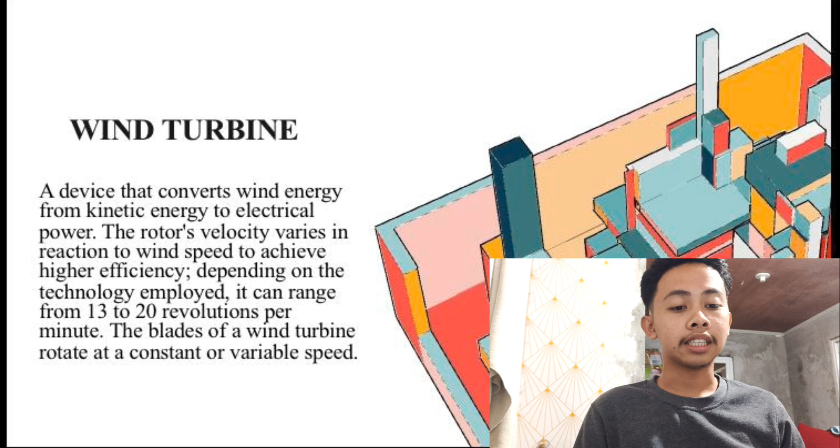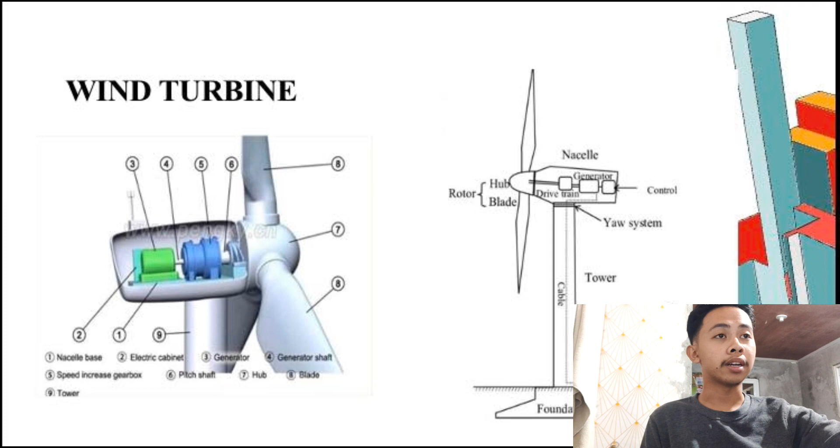And this is the parts of the wind turbine. Later on, we will discuss the parts of a wind turbine.

The operating principle of the wind turbine. The wind turbine is one type of renewable energy that generates electricity using the power of wind. As mentioned earlier, it generates kinetic energy and produces electrical energy.

The basic concept of a wind turbine is to gather potential and kinetic energy. As mentioned earlier, using the wind, it spins a rotor which is attached to the wind turbine.

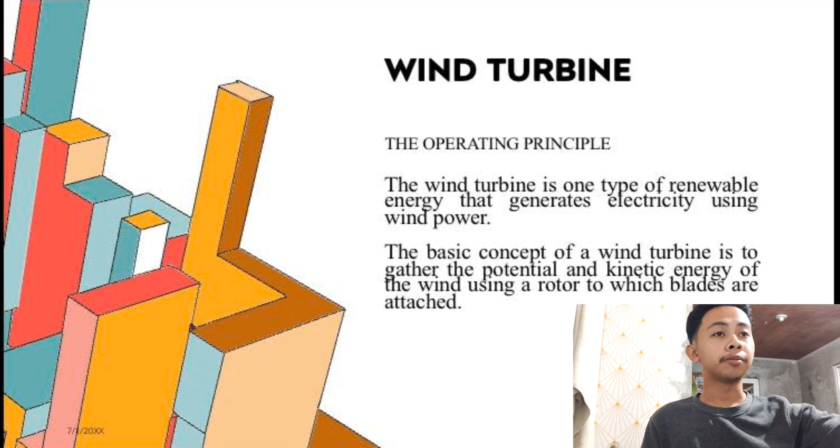Wind turbine operating principle: electricity is produced when the wind drives the blades, which in turn spins a shaft that is attached to a generator.

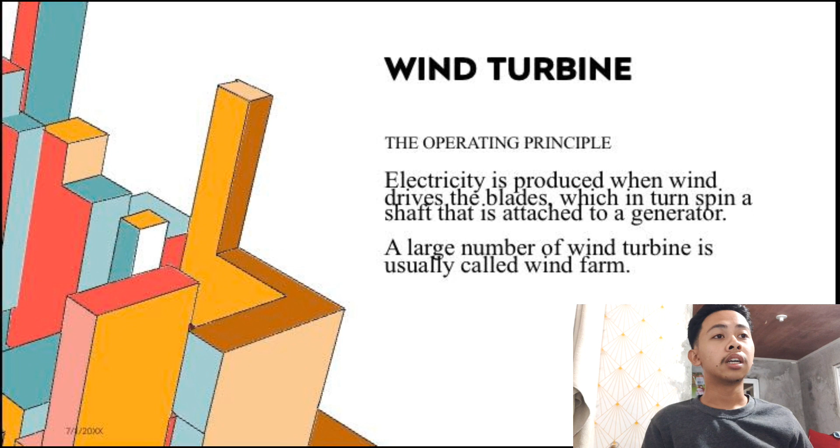Here we see the picture of the detailed parts of a wind turbine. We can see the blades, rotor, pitch system, low speed shaft, gear, controller, anemometer, wind vane, nacelle, high speed shaft, generator, yaw motor, tower, brake, yaw drive, and wind direction.

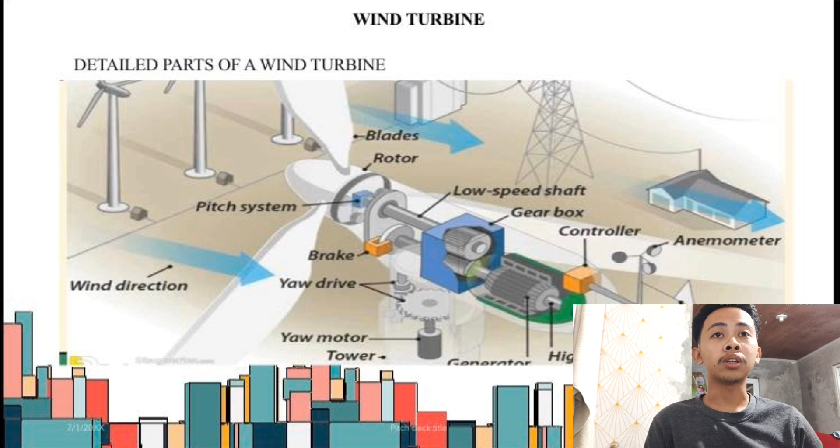The generator is another crucial component of a wind turbine. Its function is to convert mechanical energy to electricity according to the principle of Faraday's law, which is the mechanical energy converted to electricity that we can use.

And the wind vane, which we see at the very back, is a device that gives information about the wind. It helps us get information about where the wind is blowing toward and where it hits. It is usually mounted on top of the wind turbine.

The blades of a wind turbine, the large three blades, are essential for the wind turbine because those are the components that interact directly with the wind. They are the ones always facing the impact of the wind, always catching the wind.

They are aerodynamically designed to convert the wind's kinetic energy into mechanical energy, transmitted to the rotor shaft.

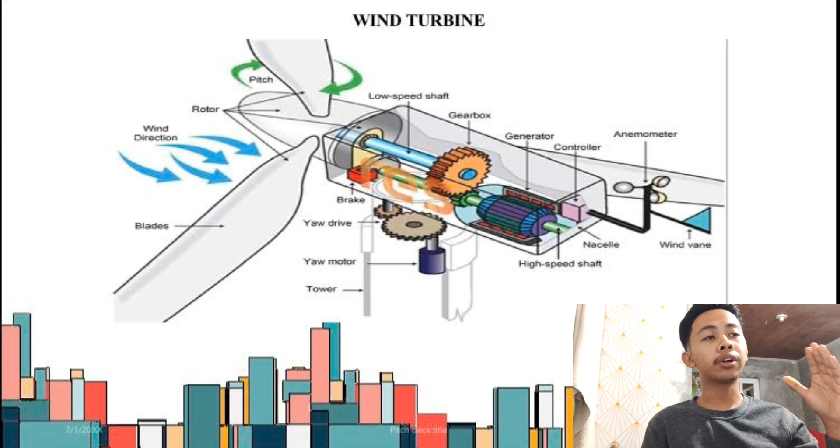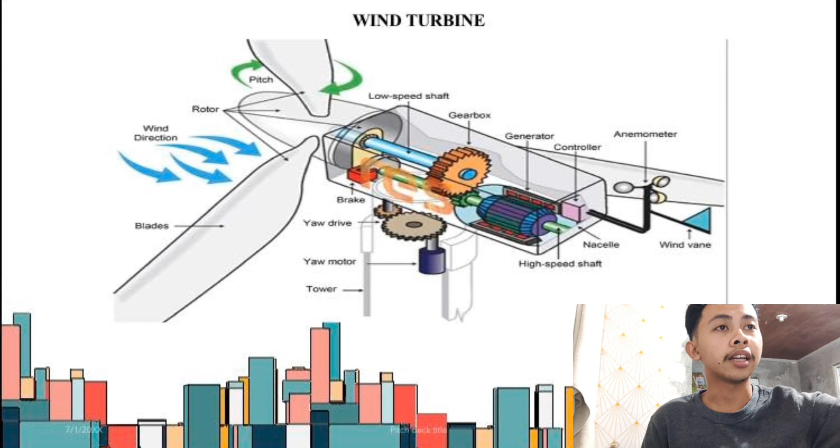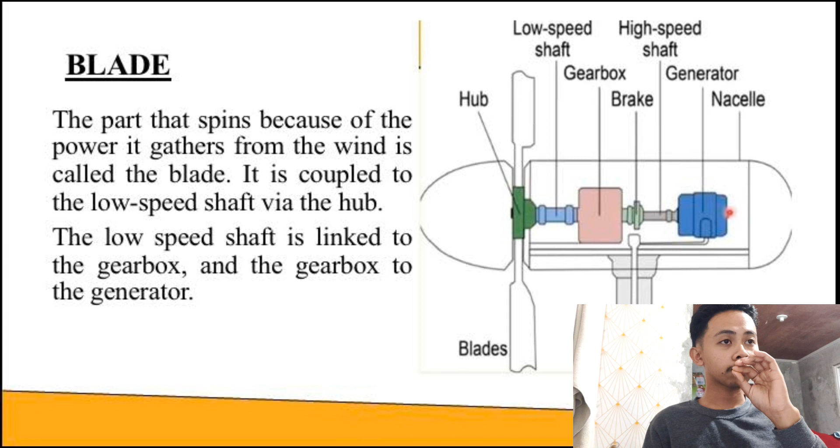Sabi dito, the part that spins because of the power it gathers from the wind is called the blade. Yon ang part na umiikot na nag-gather ng power galing sa hangin, yung blade. It is coupled to the low speed shaft via the hub. So hub, tapos siya yung nagbibigay dun sa low speed shaft na umiikot via the hub.

Sabi dito, the low speed shaft is linked to the gearbox. Makikita nyo dito na ang low speed shaft ay nakalink sa gearbox. At yung gearbox naman ay nakalink sa generator.

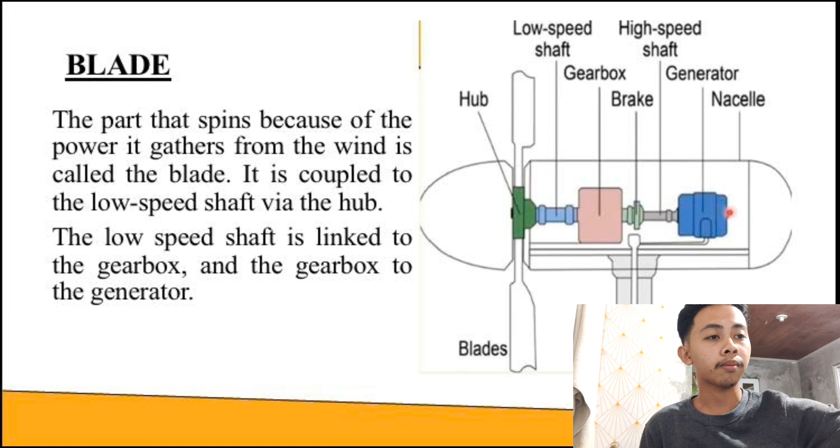Electricity is produced when the generator spins. Sabi dito, napoproduce ang electricity when the generator spins. Pag umiikot daw yung generator, nakakapag-produce daw ng electricity.

Due to the blade's revolution, most wind turbines consist of 3 blades for the best efficiency. Makikita natin na karamihan ng mga turbine na nakikita natin ay nagko-consist lang ng 3 blades para sa mas magandang efficiency.

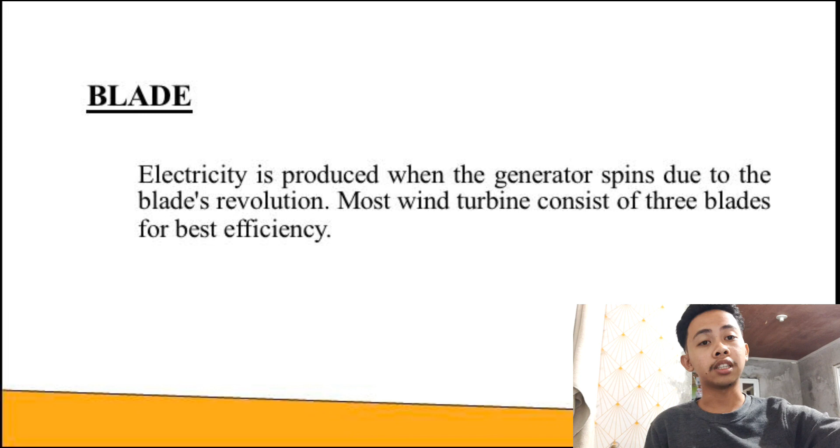Blade design. To create a quantity of electricity, wind turbine blades typically need to be huge, tall. Its design maximizes wind power output while minimizing expenses.

Sinasabi dito na ang blade design ng isang wind turbine ay nagcre-create ng quantity ng electricity. Kinakailangan daw ng isang blade ng isang wind turbine ay typically malaki at mahaba. Sabi dito, design maximize the wind power output habang minimizing expenses.

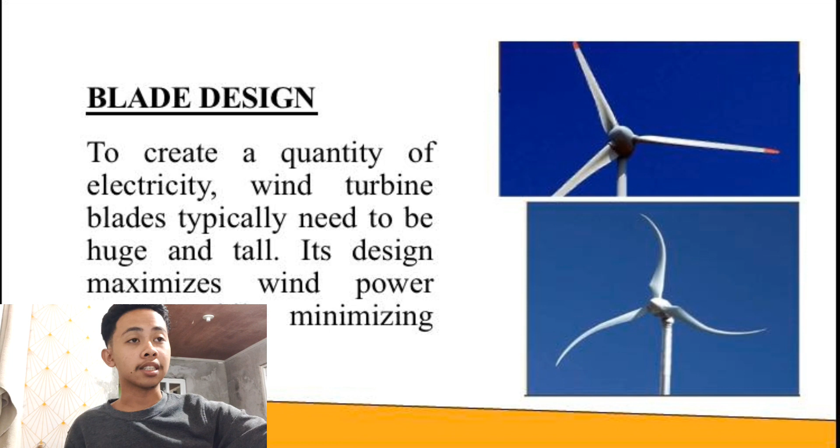The longer the blade, the better. Sabi nga, kung mas mahaba ang blade, mas better. The longer it gets, the more capability in capturing kinetic energy coming from the wind.

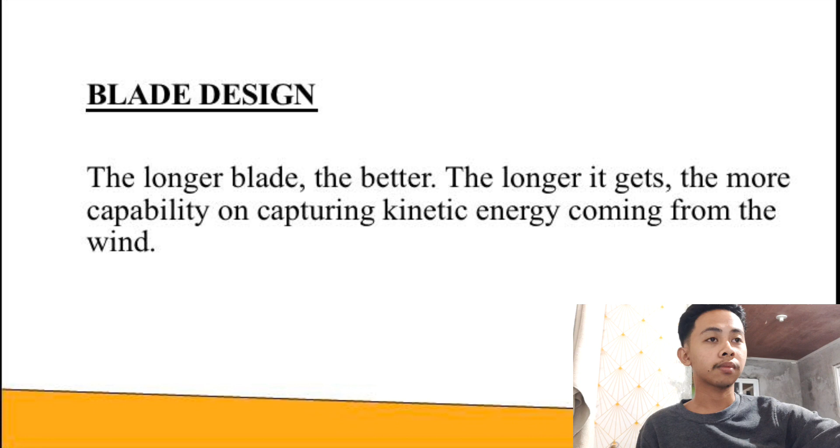New wind turbines that are quieter, more compact, and able to produce more power with less wind have been made possible by design advancement. Sabi dito, new wind turbines that are quieter, more compact, and able to produce more power.

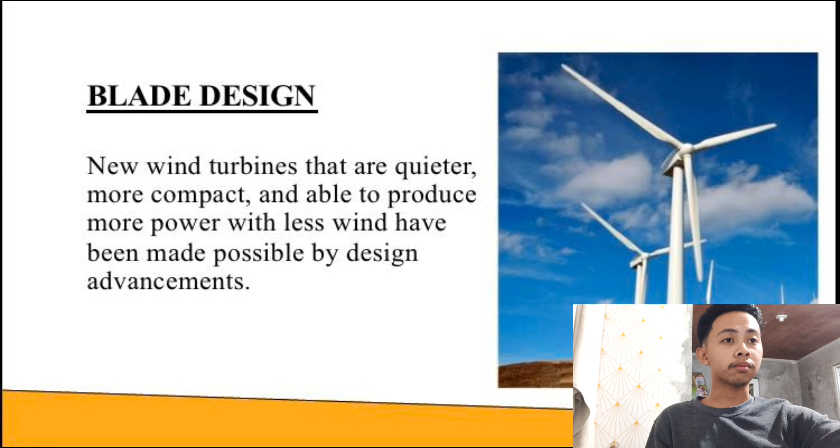Its length vary. Ito yung length o haba ng isang blade ng isang wind turbine. Sabi dito, its length varies at around 50 meters average, with 107 meters currently the longest.

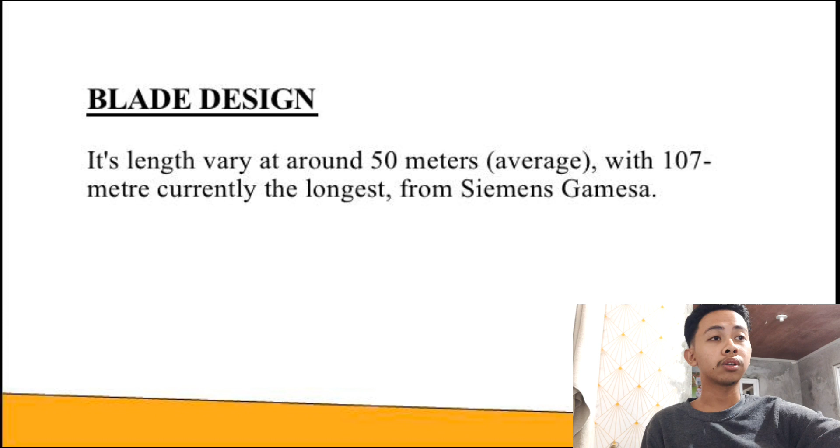Makikita natin na 107 meters currently the longest, from Siemens Gamesa. Yun lang.

Ayun, dito naman tayo sa airfoils o wind turbine parts blade design. Airfoil is a cross-sectional shape of the blade that determines its aerodynamics. They are crucial to blade design.

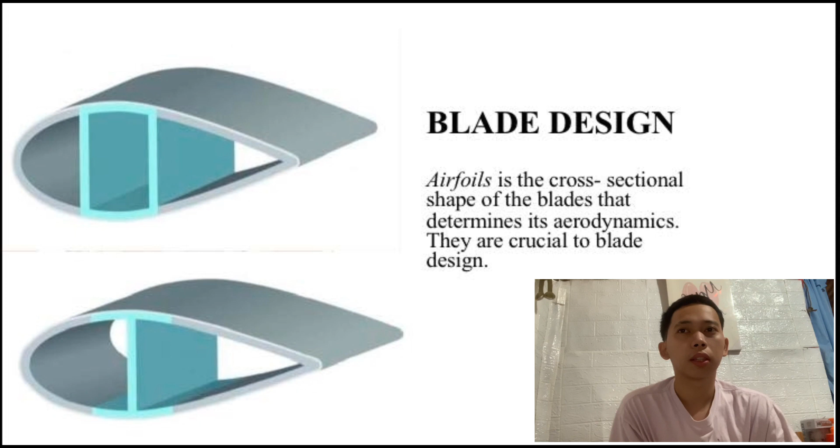With the help of this airfoil design, a wind turbine may move its blade tips faster than the wind, producing more power and higher efficiency. Yung tulong ng airfoils sa wind turbine ay para maging mas malakas at tumaas yung pagpo-produce ng electricity.

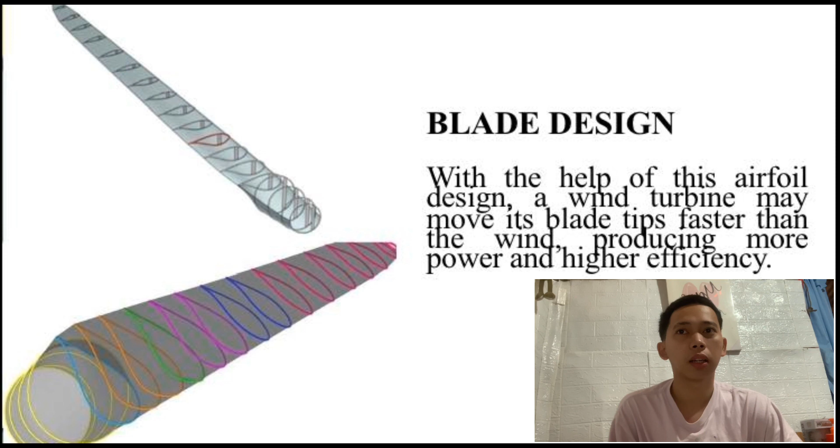Malaking tulong ito sa mga wind turbine, kasi sabi nga unpredictable yung wind. So through this airfoil, mas ayos niya mabuti yung operation.

Next is the airfoil design. Dito makikita natin yung mga types ng airfoils. Meron mga most curve, tapos meron ding lightly curve lang naman. Pinapakita dito na merong iba't ibang design ang airfoil. Thick airfoil family for large blades, then thin airfoil family for medium blades.

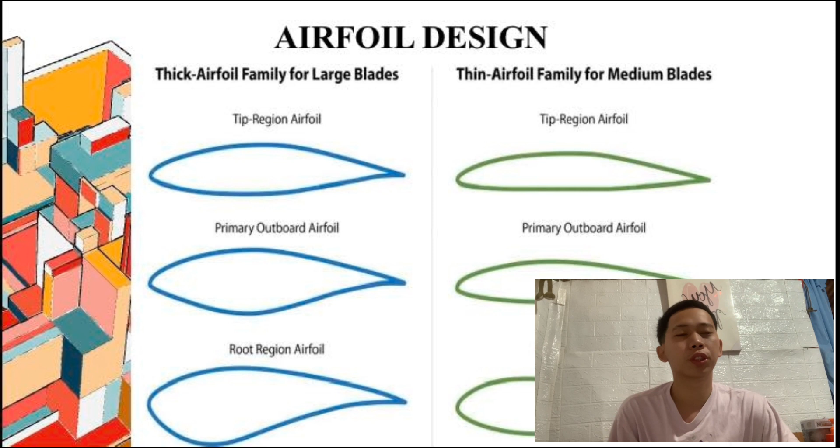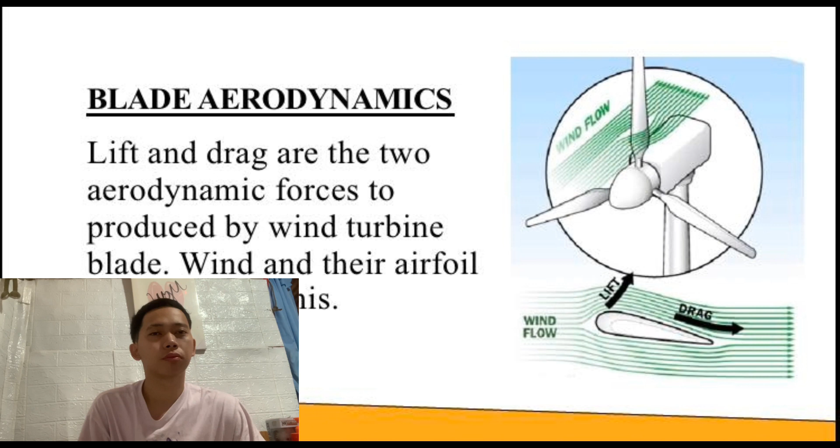Next, lift and drag are the two aerodynamic forces produced by wind turbine blades. Wind and their airfoil are playing for this. Meron two types yung aerodynamics, lift and drag force. Yung lift ay perpendicular to the airflow, tapos yung drag naman ay in the line. Makikita nyo dito sa figure na ito, yung lift paangat papunta, tapos yung drag naman ay parang in the line lang sa agos ng ihip ng hangin.

Wind turbine parts, lift and drag formula. Sa pagkuha ng lift and drag formula, this is the equation: lift equation, tapos yung drag equation. Ito yung para makuha natin yung bilis tsaka yung pag-angat ng hangin.

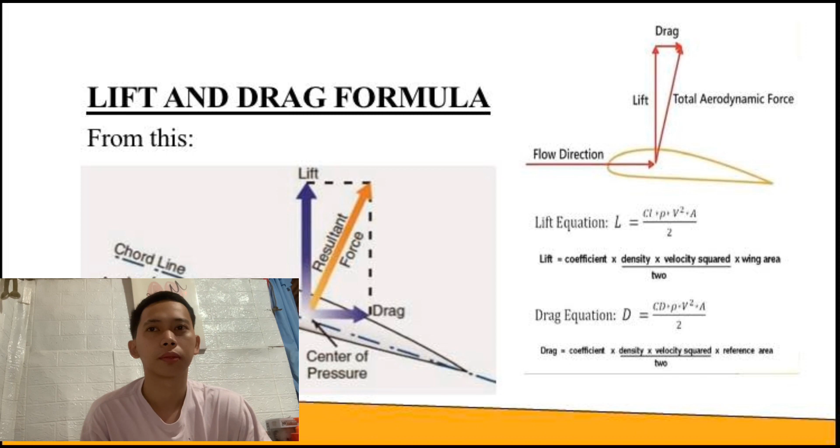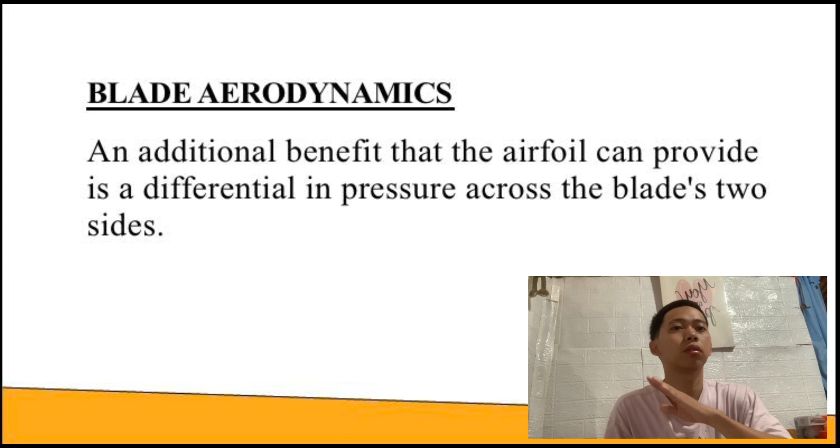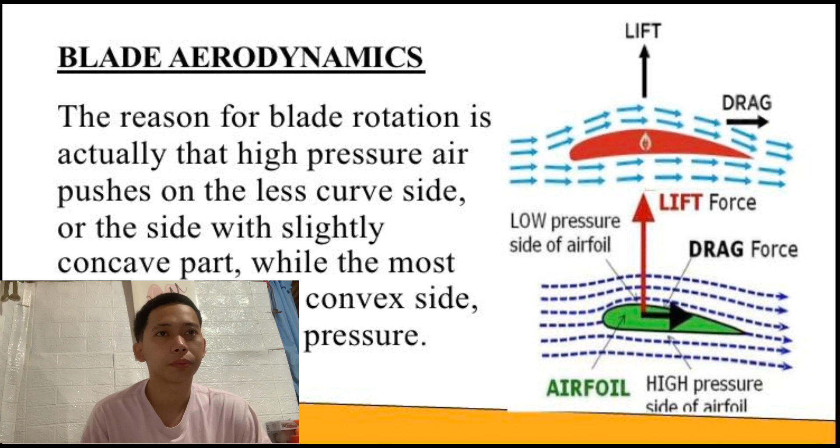An additional benefit that the airfoil can provide is a differential pressure across the two sides. Both sides have benefits, front and back. It shouldn't be the same curve - there should be a less curved side and a more curved side. The reason for blade rotation is that higher pressure air pushes on the less curved side, while the most curved or convex side generates low air pressure. So as explained, each side needs balance - high pressure air pushes the less curved side, as we can see in the figure, while the most curved side generates low air pressure.

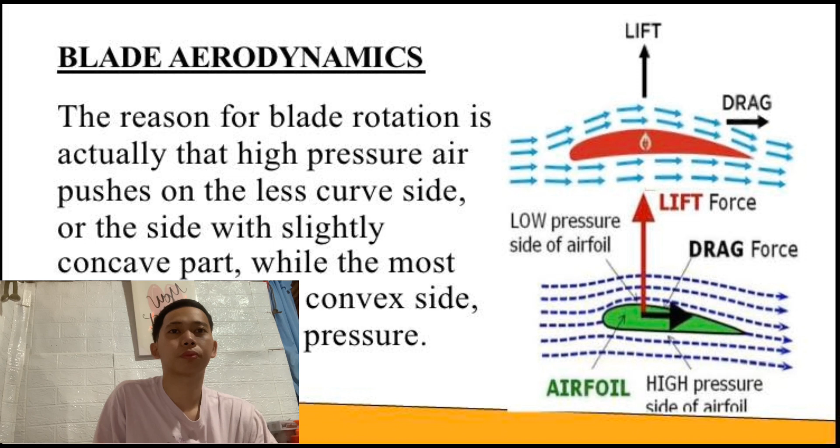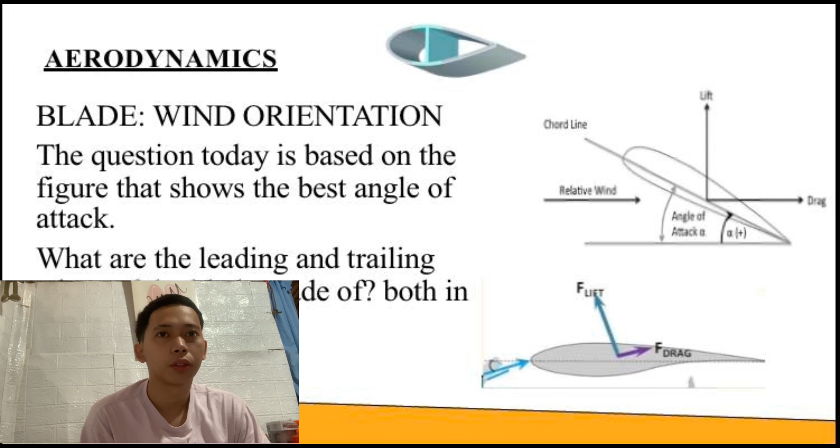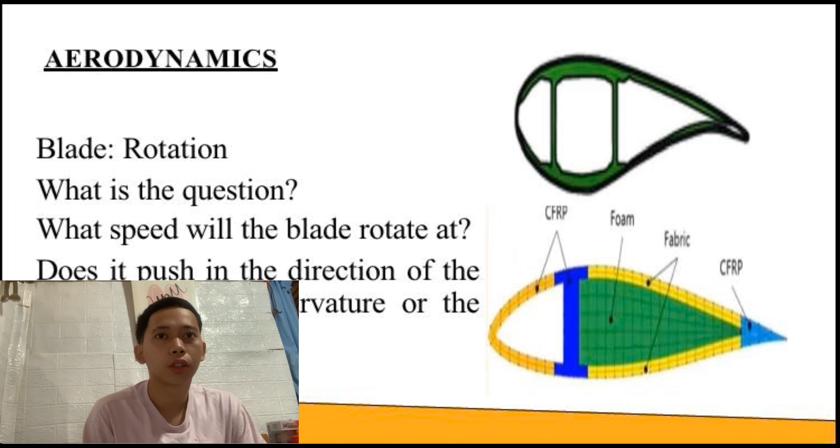Blade rotation - what is the question? What speed will the blade rotate at? Does it push in the direction of the side with greater curvature or the side with less curve?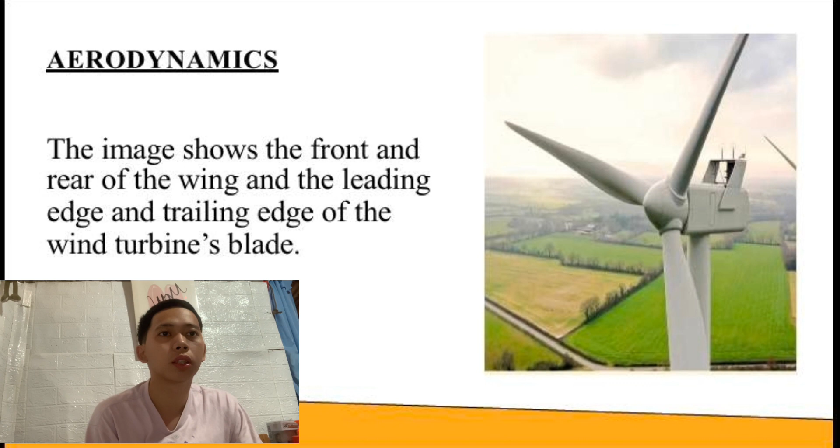Next is blade wind orientation. The image shows the front and the rear of the wing, and the leading edge and trailing edge of the wind turbine's blade. That's based on our PPT.

The thing that needs to be considered when designing a blade is twisting and tapering of its lateral portion. Did you know the blades aren't just simply curved - they're twisted and tapered? Because with this kind of blade design, the rotation speed increases.

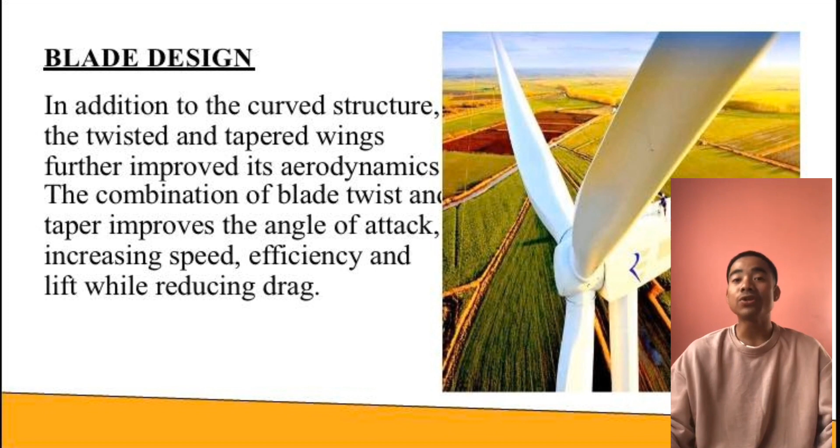And there's what's called lift, while reducing drag. So what is lift? Lift is the reason why rotation occurs. And drag is what opposes the rotation - it should be reduced. Take note: if you're designing a blade, you should focus more on lift force and reduce the drag force.

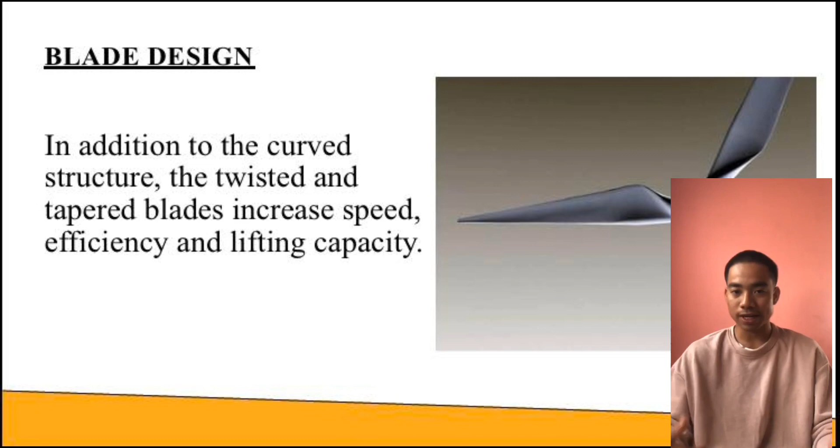So, here is the question based on the previous slides: what number of blades is the best design considering all the factors in construction and operation of a wind turbine?

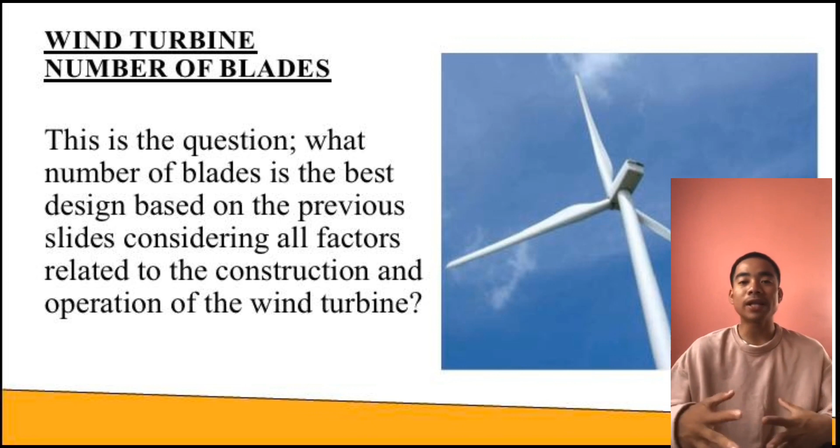As I said earlier, in designing blades, the one that should be minimized is the drag force - that's what we should reduce. And the one that should be maximized or increased is the lift force. Here are the rules of thumb.

The fewer blades, the better, since there will be less drag and an increase in efficiency. Because the more blades there are, they serve as an obstruction. And the more obstruction there is, the bigger the drag force becomes. So the fewer blades, the better.

Since there will be less drag - and on the other hand, the number of blades increases the torque and reduces the optimum rotation speed. To clarify further, what exactly is torque?

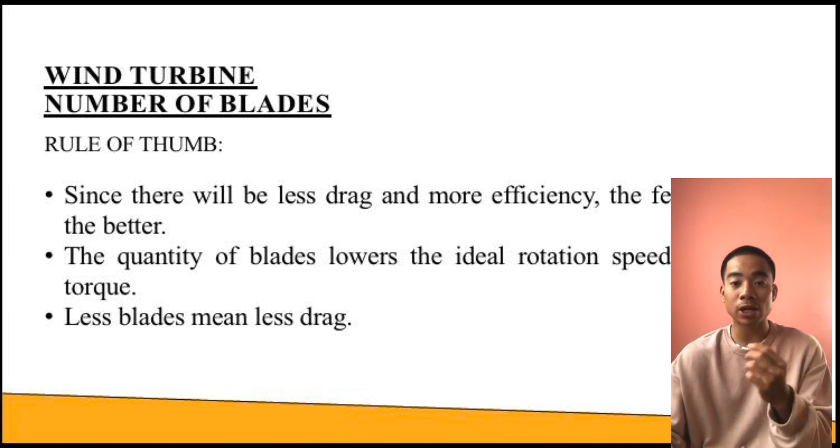One blade, because of the decreased drag, one blade would be the optimum number when it comes to energy yield. However, one blade could cause the turbine to become unbalanced, and this is not a practical choice for the stability of the turbine.

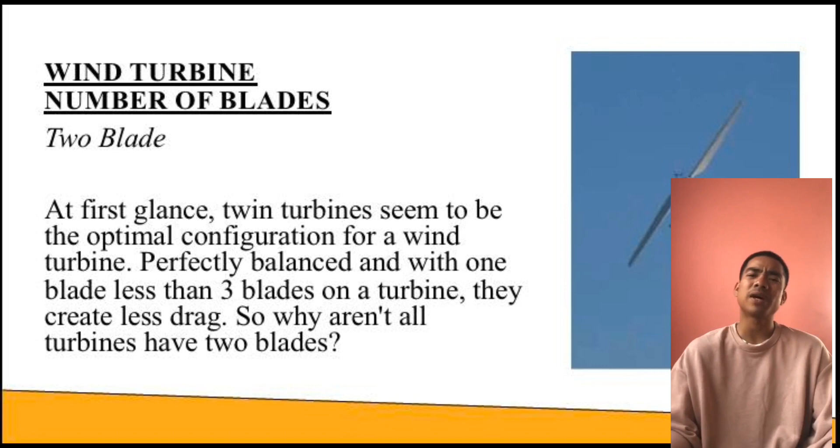At first glance, two-bladed turbine seems like the optimal configuration for a wind turbine. Perfectly balanced - yun yung sinabi ko kanina. And with one less blade than a three-bladed turbine, they will generate less drag. So why are not all turbines made with two blades? So ito nga yung pinaka-issue.

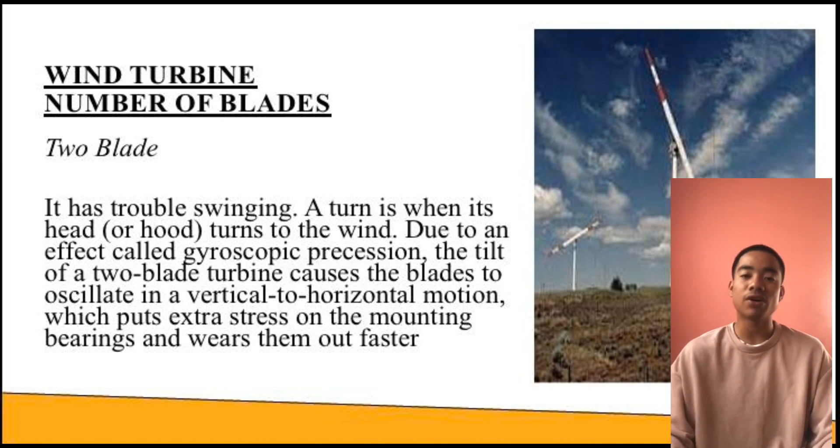So nabanggit nga dito ni Sir Marvin na yung two-bladed turbine nyo, it becomes wobbly. Ito magkakaroon ulit ng unbalanced force which puts stresses in individual parts. And for that reason, this two-bladed design is unlikely to be selected when it comes to design of number of blades. So dito naman tayo sa more than 3 blades.

Any number of blades greater than 3 blades would create greater wind resistance, slowing the generation of electricity and thus becoming less efficient than a 3-blade turbine. Parang ganito lang yun eh - the more blades, pinapataas mo lang lalo yung drag force. So that's why the best talaga ang 3-bladed.

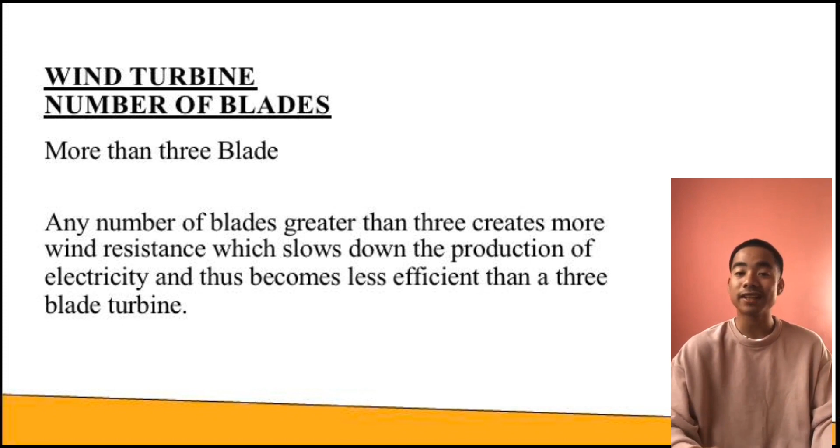Okay, tayo doon. So ayun, basahin na lang natin yung ibig sabihin dyan. Any number of blades greater than 3 would create greater wind resistance, slowing the generation of electricity and thus becoming less efficient than a 3-blade turbine.

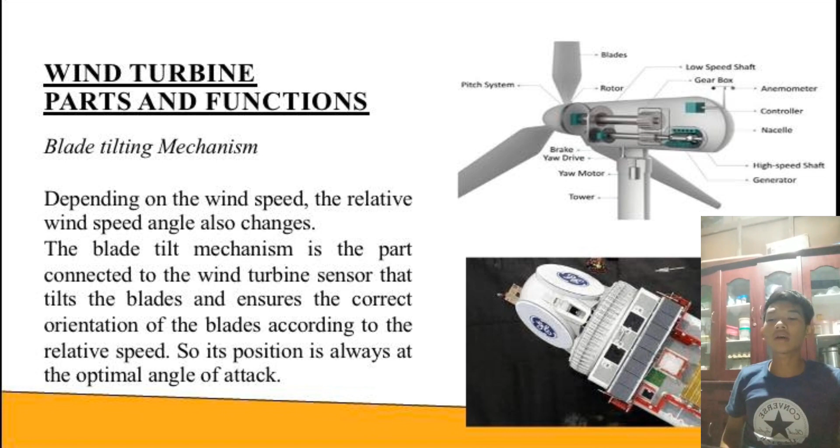Blade tilting mechanism. Depending on the wind speed, the relative wind speed angle also changes. The blade tilt mechanism is the part connected to the wind turbine sensor that tilts the blade and ensures the correct orientation of the blade according to the relative speed, so its position is always at the optimal angle of attack.

Nacelles. The housing behind the blade that houses the generator, gearbox, slow speed shaft, and other tiny components.

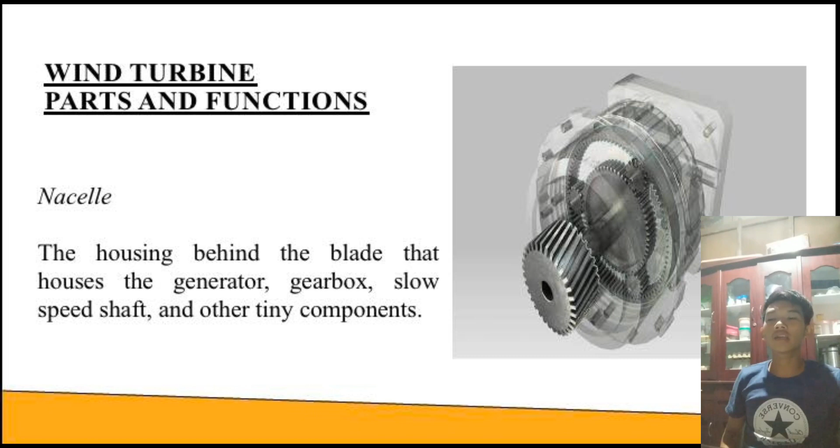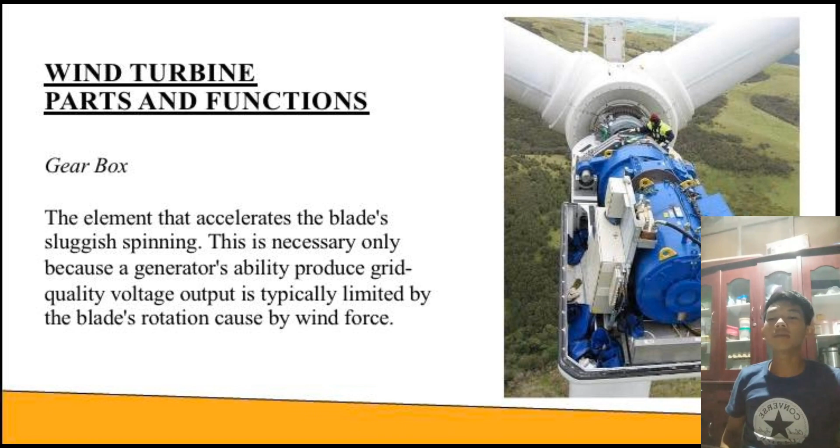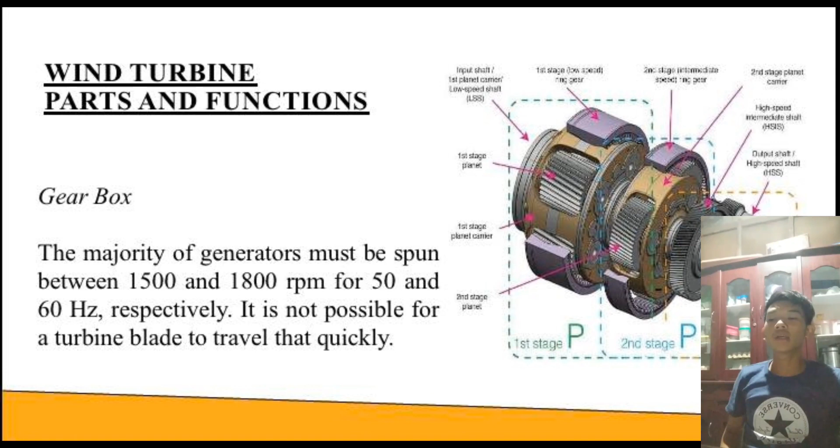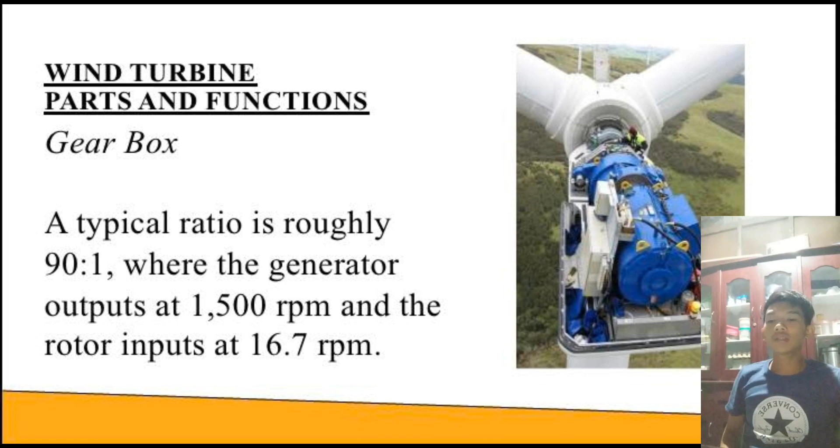Gearbox. The element that accelerates the blade's slow spinning. This is necessary because a generator's ability to produce grid-quality voltage output is typically limited by the blade's rotation caused by wind force. The majority of generators must be spun between 1,500 and 1,800 RPM for 50 and 60 Hz respectively. It is not possible for a turbine blade to travel that quickly. A typical ratio is roughly 90 to 1, where the generator output is at 1,500 RPM and the rotor input is at 16.7 RPM.

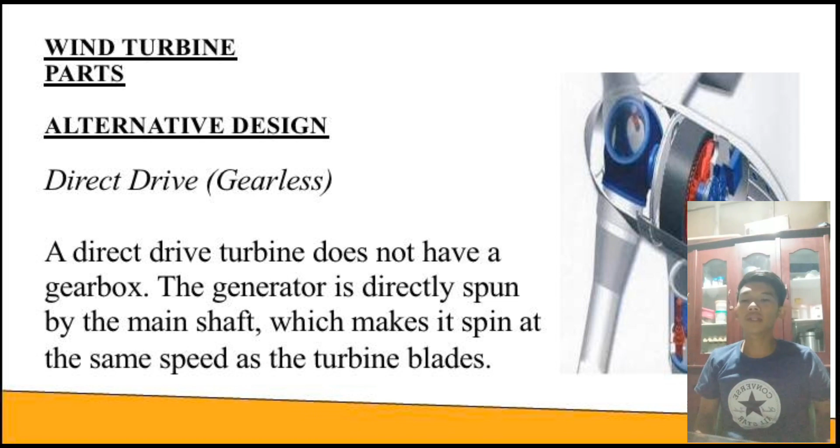Direct drive or gearless. A direct drive turbine does not have a gearbox. The generator is directly spun by the main shaft, which makes it spin at the same speed as the turbine blades. In contrast to geared types, the PMDD generator's slow rotation and fewer moving components lessen fatigue and pressures on the turbine, resulting in less noise and vibration, a longer lifespan, and cheaper maintenance costs.

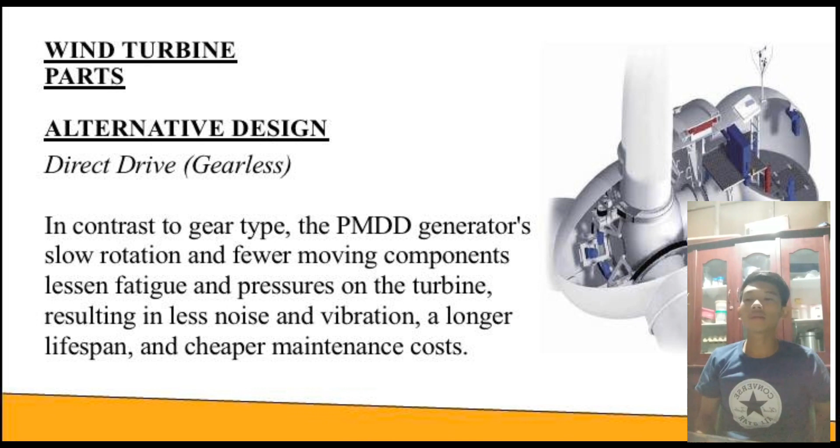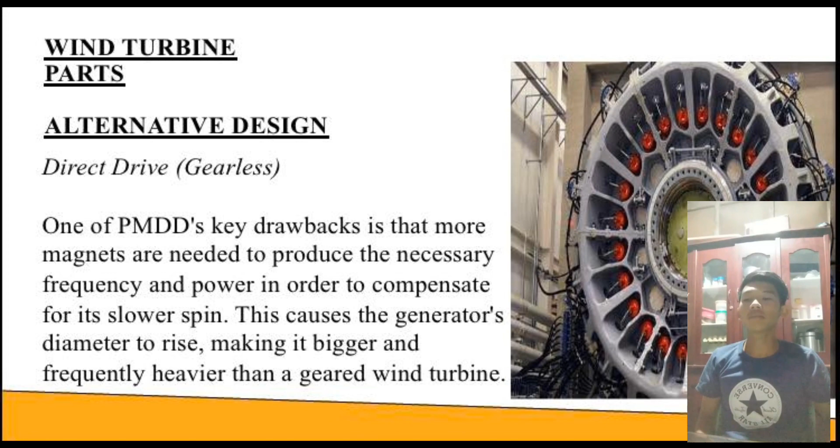One of PMDD's key drawbacks is that more magnets are needed to produce the necessary frequency and power in order to compensate for its slower spin. This causes the generator diameter to rise, making it bigger and frequently heavier than geared wind turbines. Another issue is that the additional magnets of this type are composed of neodymium, which is a costly material. Up until recently, gearbox turbines were primarily unopposed by direct drive turbines due to their weight and cost.

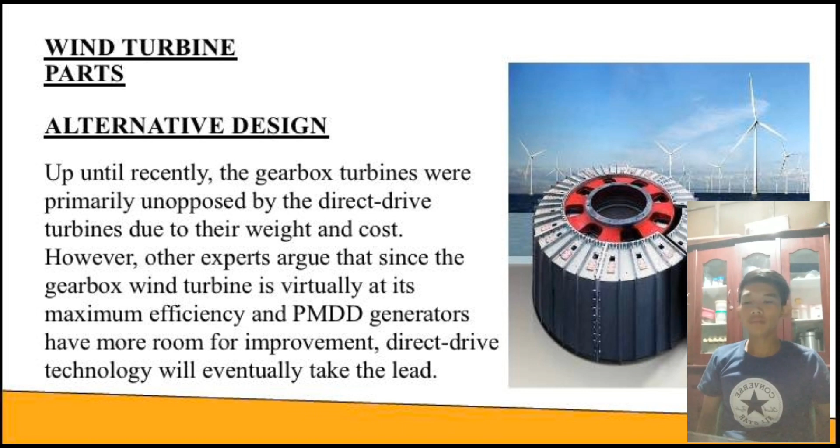However, other experts argue that since the gearbox wind turbine is virtually at its maximum efficiency, and PMDD generators have more room for improvement, direct drive technology will eventually take the lead.

Brake: a wind turbine brake system is a safety feature connected to sensors to immediately stop the blades from rotating. It senses activity that could endanger the system while in use, such as extremely high wind speed, malfunctioning parts, and maintaining power lines.

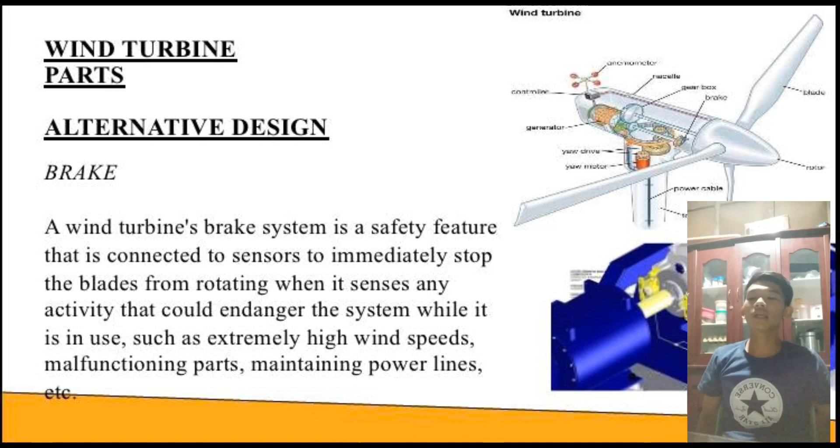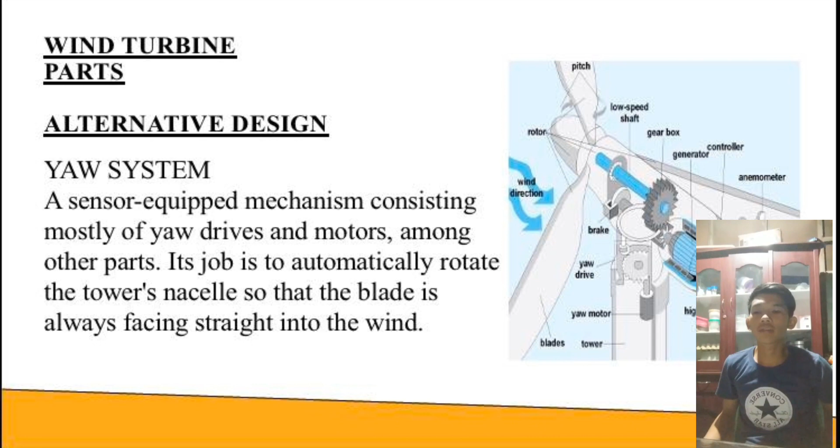A sensor-equipped mechanism consisting mostly of yaw drives and motors, among other parts. Its job is to automatically rotate the tower's nacelle so that the blade is always facing straight into the wind. Using electronic data provided by the wind vane at the back, it determines its correct direction. This guarantees that the wind turbine is generating the most electricity possible.

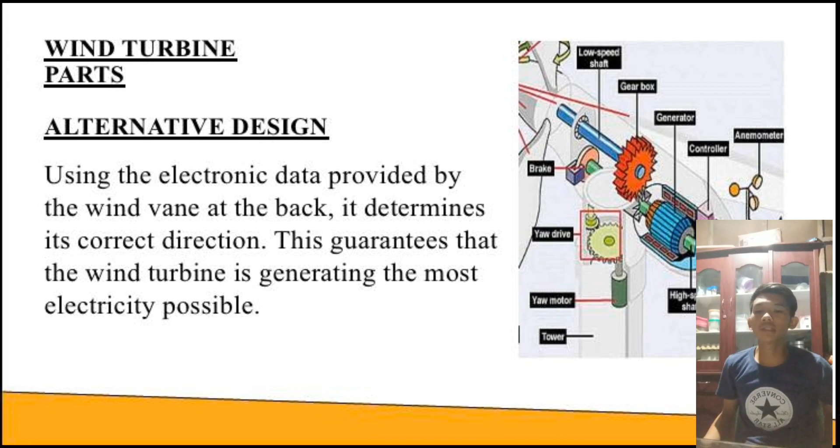The tallest standing tower is at 280 meters. It is still expected to be finished by the middle of 2022 and installed at the test facility in Western Jutland, Denmark.

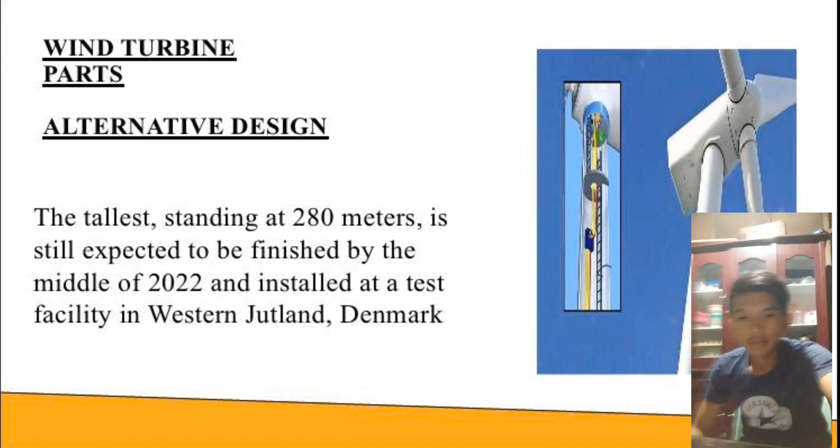Tower: wind speed increases with altitude. This suggests that the height of a tower affects how much electricity it can produce. Most wind turbines are supported by conical tubular steel towers, which vary in height from 75 to 110 meters, depending on the diameter of the blades.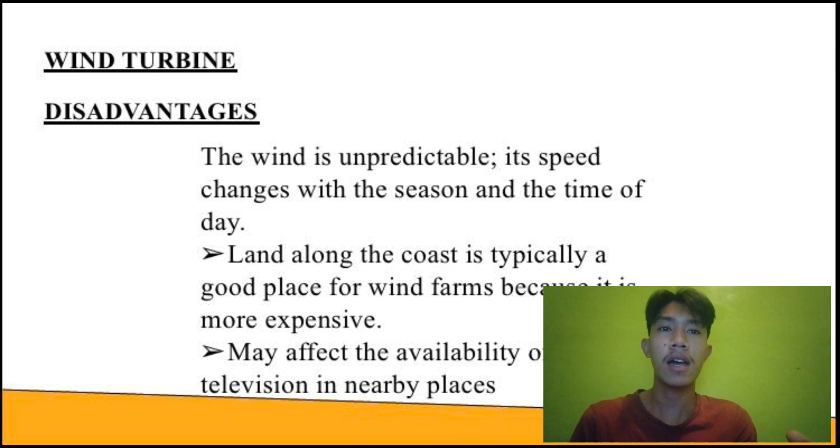Second, land along the coast is typically a good place for wind farms, but it is more expensive. Third, it may affect the availability of television in nearby places.

The largest wind farms in the world: the first one is Gansu Wind Farm in China. It can produce 7,965 megawatts and the target is 20,000 megawatts.

Next is Alta Wind Energy Center in California, USA. It can produce 1,548 megawatts and the target is 3,000 megawatts.

Next is Muppandal Wind Farm in India. It can produce 1,500 megawatts.

Next is Hornsea Project One in the UK. It can produce 1,218 megawatts. Next is Markbygden Wind Farm in Sweden.

It can produce 1,120 megawatts and the target is 4,000 megawatts.

Next is Jaisalmer Wind Park in India. It can produce 1,064 megawatts.

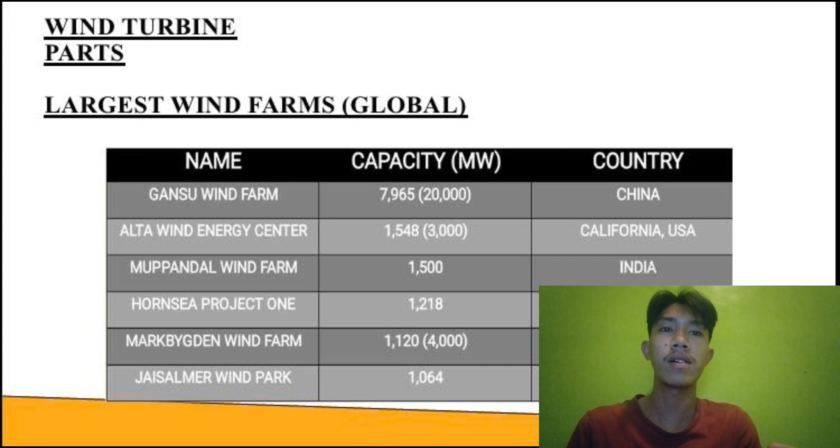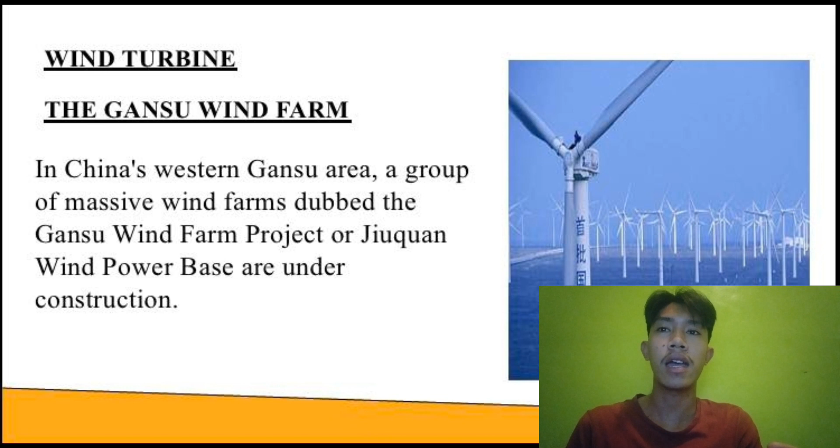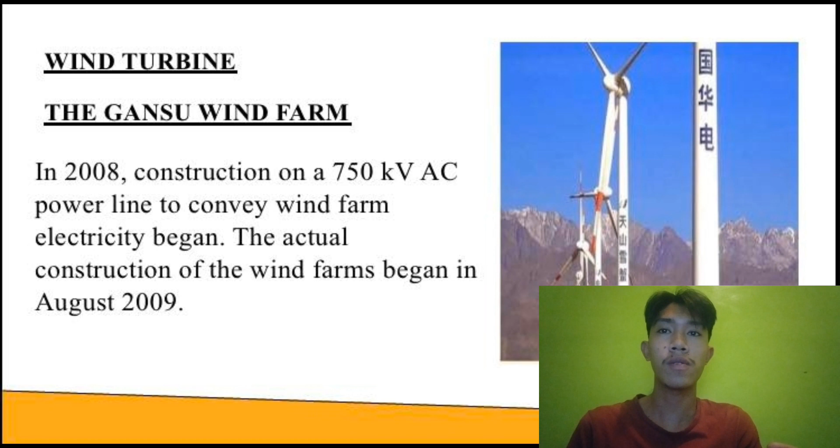It is a group of massive wind farms dubbed the Gansu Wind Farm Project, or Jiuquan Wind Power Base, currently under construction. In 2008, construction on a 750 kV AC power line to convey wind farm electricity began. The actual construction of the wind farm began in August 2009.

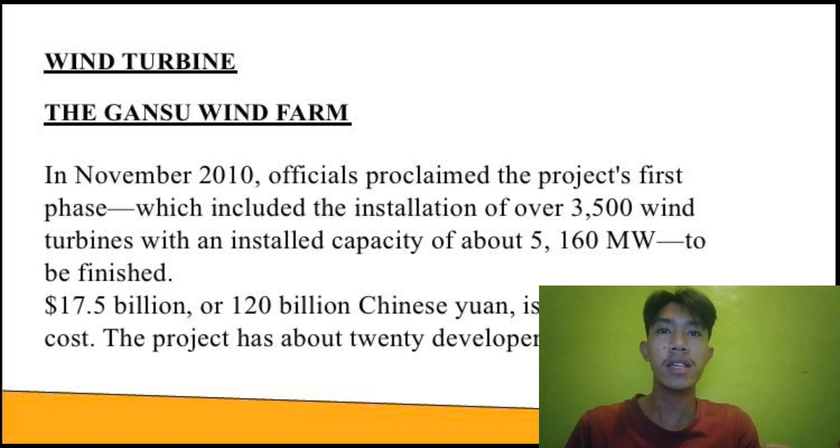In November 2010, officials proclaimed the project's first phase finished, which included the installation of over 3,500 wind turbines with an installed capacity of about 5,160 megawatts. It cost $17.5 billion, or 120 billion Chinese yuan, as the estimated cost. The project has about 20 developers working on it.

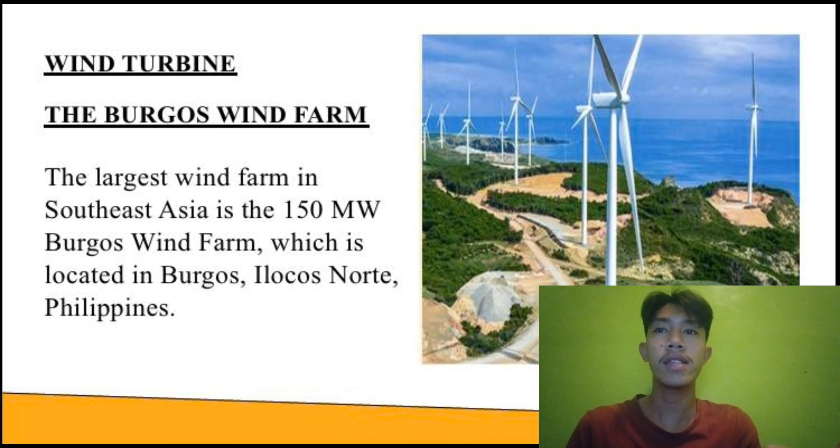The Burgos Wind Farm: the largest wind farm in Southeast Asia is the 150-megawatt Burgos Wind Farm, located in Burgos, Ilocos Norte, Philippines. Construction of the wind farm was completed in 2015.

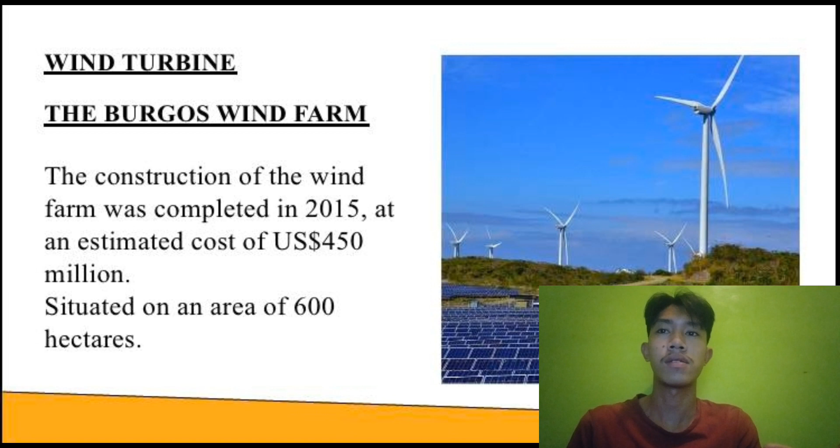At an estimated cost of $450 million, situated on an area of 600 hectares, the plant uses 50 wind turbines, each with a 3-megawatt capacity, to generate electricity for the Luzon grid. Each wind turbine has a rotor diameter and hub height of 75 meters, and they are each supported by a tubular steel tower.